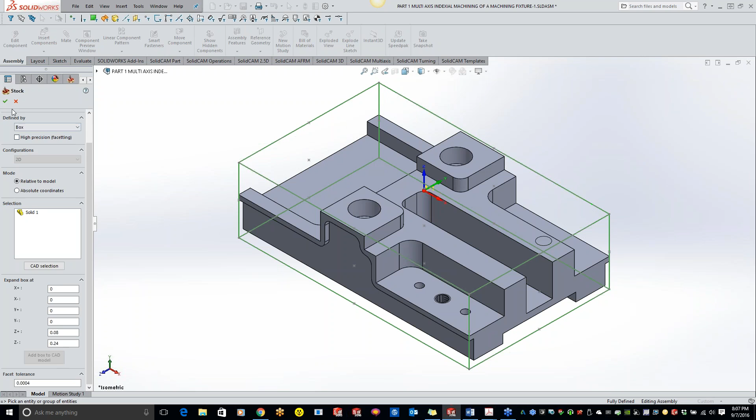So by clicking that green checkbox, we have everything all set. We have green check marks by everything. Now, if you guys are looking at your SolidCAM, it looks a little bit different.

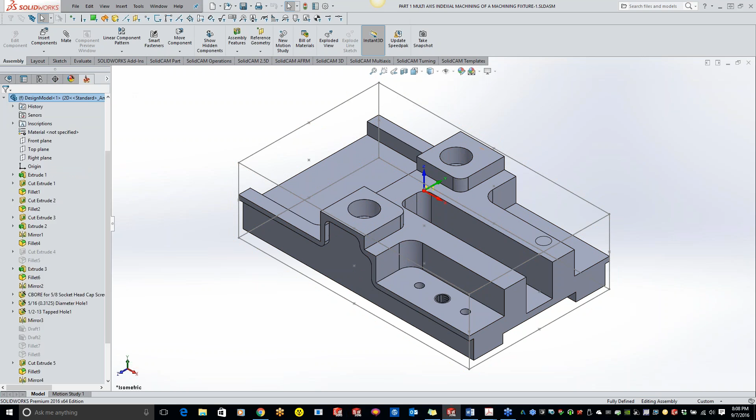Hit the green check mark, and we can start programming. So you'll see that we're still 100% inside SolidWorks. If we need to go back to our SolidWorks at any point in time, you can just click on your SolidWorks tab and have all my features right here. So I'm just going to start off with a simple face mill. Just right click, add milling operation, and do face mill.

Now with 2016, it automatically found my perimeter for me. If I want, I can do a show, and it'll show me a wireframe of where it's going to face mill out to. So if we do a straight down view, you'll see it covers the whole part. Now I'm going to grab a tool. I'm going to hit select. For this one, I'm actually just going to add one, and later we'll bring some tools in for you guys from the libraries that you have in your install.

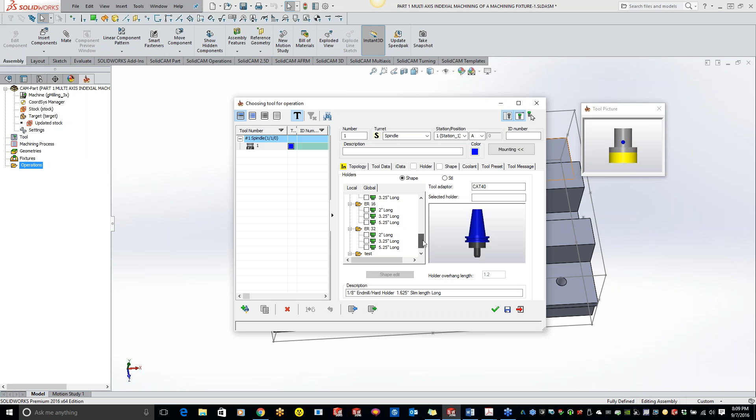So we'll turn our tool on, and we'll do a 2-inch face mill. And if I want, I can get this tool picture out of here. I can get my holder on there, and put different holders on there if you guys want. For right now, we'll just leave it with no holder on there. With the holder, if you guys didn't know, it is full crash detection and everything for you guys.

So now, got our levels right here. So my upper level, if you're not ever sure, you can just click on the part. And what I'm going to do is grab the top corner. And when you see it green right here, that means it's physically linked itself to the SolidWorks model.

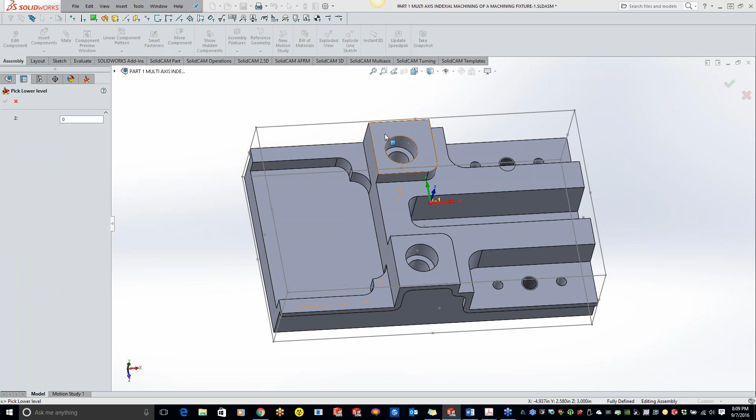And I'll face mill down to that depth right there, and we'll use a hatching pattern. Inside the hatch, I can change angles, I can extend it off. As I'm clicking through here, you guys will see the picture down here update for you.

So definitely, if you guys have questions, you can click on what you're looking for, or like I said before, click the question mark, and you can click in that field, and it will tell you exactly what's going on. We put a lot of time into these help menus for you guys, so definitely take advantage of that.

Back at the tool holder, we had a question regarding the Cat 50 holder library. We don't have a Cat 50 holder library right now, it's all 40 in there. But we can definitely create Cat 50 holders for you guys, it's no issue at all. We might actually do that as a class, showing you guys shaped holders and stuff. I think we covered shaped tools in a previous session with the tool libraries, but you can definitely create the Cat 50 holders for the larger machines out there.

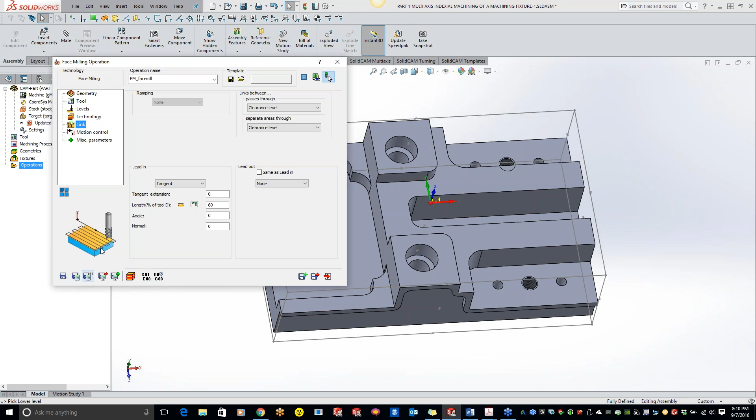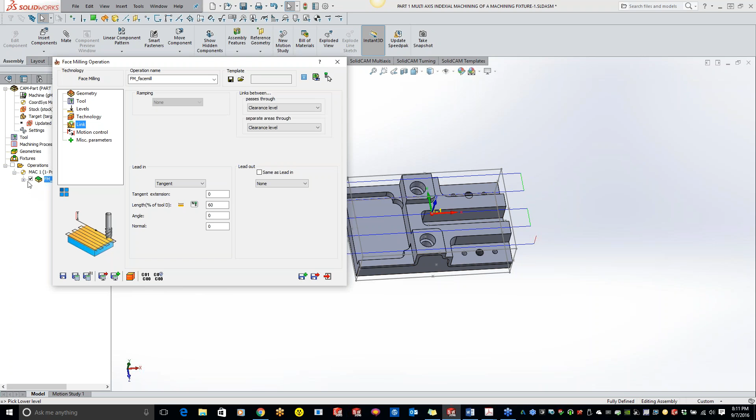Once we get everything set, we can just do save and calculate. Right now you'll see that as I move my mouse around, I have the tool there. If you guys ever want that off, just click the little box right here and that will eliminate it. Another quick shortcut: if you want to see the tool path, it's defaulted, so as soon as you do save and calculate it automatically turns on the tool path. But if you want a better view, just double click up here, it minimizes the face mill operation box, and you can zoom in and see what you're looking at. Then just double click on it to get it back.

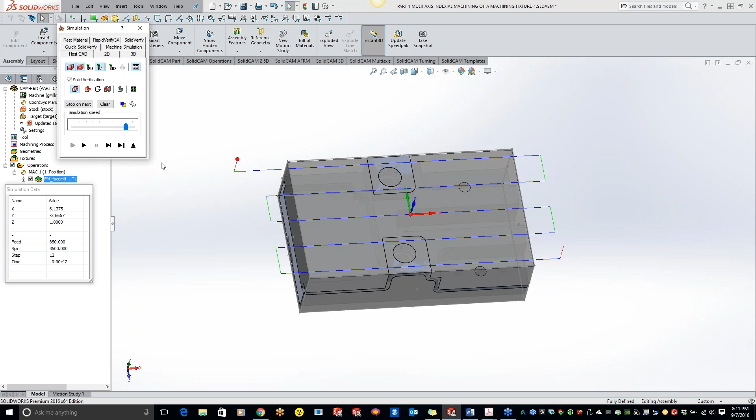Now, if we want to do a simulation, there's lots of different simulations in here. My two favorites are Host CAD and SolidVerify. Host CAD does the wireframe of kind of what you're seeing right here. We can also do a Quick SolidVerify, showing you the stock that's there and whatnot. But my favorite is SolidVerify. Come in here, we'll slow it down a little bit for you guys, and you can see it machining off the part there. So this is full crash detection for you guys.

You'll see that we actually have cycle times down here, your X, Y, Z values, feed rates. You'll see a feed rate of 850 right now - that's not the feed rate it actually machined at, that's the rapid feed rate right there. So that is face milling.

Now we'll get into a little bit of a complex pocketing. Before, you'll see that we have multiple different levels, and there's a million ways to machine this part. We can mill these off on each level height, or we can do 3D machining and basically wipe out the whole entire part and just come back and finish up the walls and stuff. But since we're going over some easier 2.5D tool path here, we're just going to stick with standard pocketing.

So I'm just going to add a milling operation right here and do a pocket. If I go to my SolidCAM, you can right-click and add operations right here, or you guys can just use your SolidWorks ribbons up here and click on pocketing also - it does the exact same thing, just shortcut keys in there for you guys, and you can modify these just like SolidWorks. If you don't want to see one of these in here, you don't use it often, click and drag it off and it will get rid of it for you. These are fully customizable, so definitely take advantage of that. Set them up as shortcut keys too, or mouse gestures also. So we'll do pocketing.

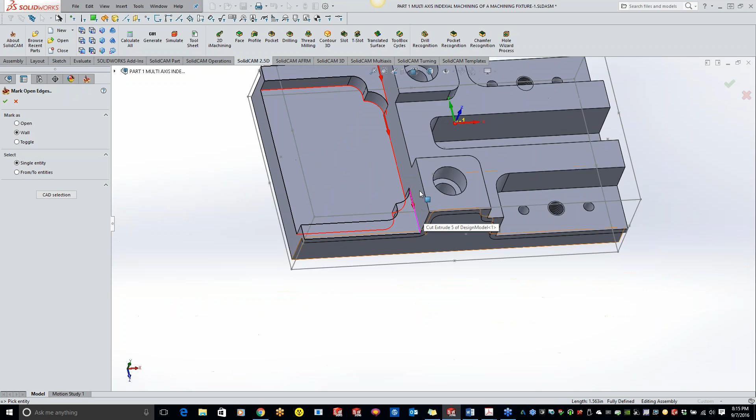So I got that one. We'll do the same thing over here. Got our chain. I'm going to mark that chain as open and come back and do open edges and turn that on as a wall. You'll see it turns pink for you guys. Hit the green check mark.

Now I can start working on the pockets on this side. So I got my chain there. We'll do mark open edges, and we'll do open. Sometimes the little wireframe gets in the way, so just go ahead and rotate your part. Hit the green checkbox there, and we'll continue going over to this pocket over here.

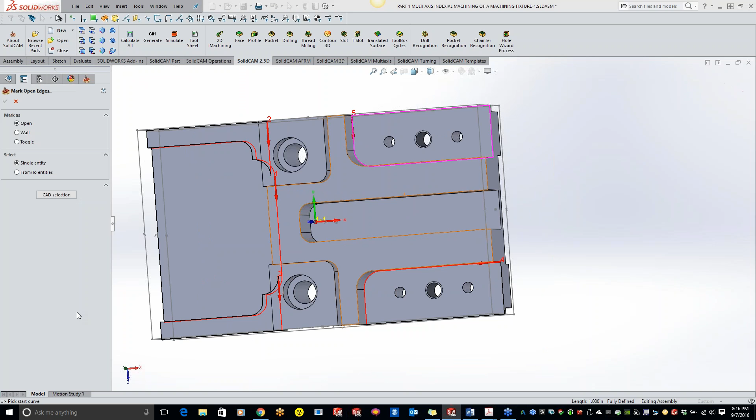And we'll do another mark open edges. All right, so we got that spot pocketed out. Now we'll go ahead and grab this inside one here.

Same thing again, mark open edges, and I'm going to tell it that this area over here is open. Now we're going to pocket out the whole top here.

All right, and we'll actually reverse that chain. Now, basically, I'm going to mark everything as open instead of going through and marking open edges one by one. So I'll mark the chain as open, then come back and mark open edges and tell it that these 6 areas are actually walls, so it doesn't violate my walls here.

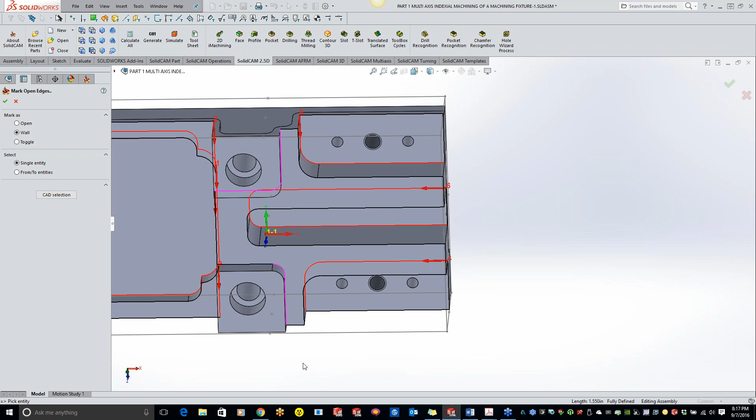Okay, so now we have all of our chains for all of our pocketing here. I can hit the green check mark out, and we'll go ahead and grab a tool.

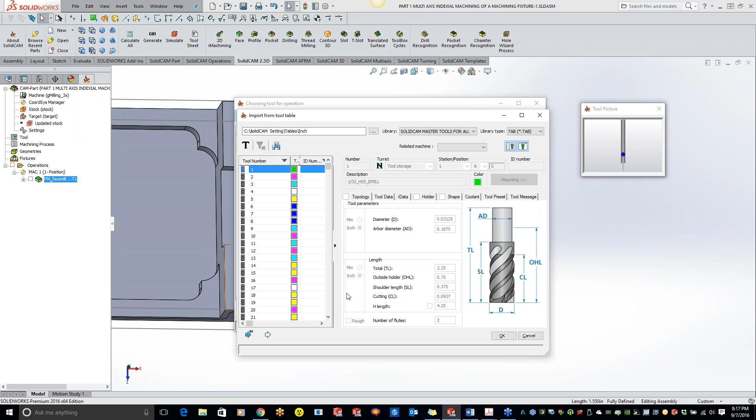Now this time I'll do an import. This one is actually set for mild steel, so I can come in here and grab mild steel if I want, or we can grab the aluminum. It really doesn't matter. You guys can also expand this so you can get some more information in here.

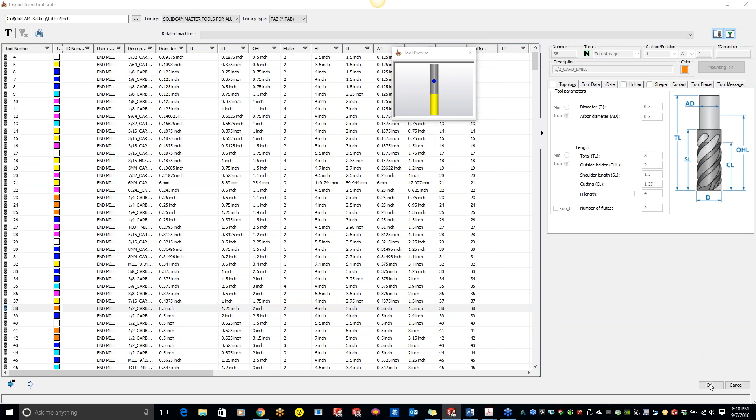So what I'm going to do is grab a 1/2 inch end mill here. I'll just go through, I got a bunch in here for you guys, so definitely take a look at what's in there. So I'll grab that 1/2 inch and hit OK. Oop, looks like I got it twice. Delete that one.

Okay, so hit the green check mark and come into our levels. Now here's the difference: right now it's set to all being a constant 1 level. Constant 1 level is you just pick the upper level and pick the lower level. Since all these are done at multiple different levels, we're going to want to click on variable levels.

So now what that does is it eliminates the upper level and lower level. With the variable levels, you can just open this up and tell it what the depth is. So our chain 1, you'll see how it highlights in yellow. I can just click on my depth right here and click on the bottom of the part, and it's going to pick that depth up.

So my chain 2, I'll just click on that one. My chain 3, click on that level right there. Chain 4 is going to be this level. And chain 5 will be right here. Chain 6 is that center.

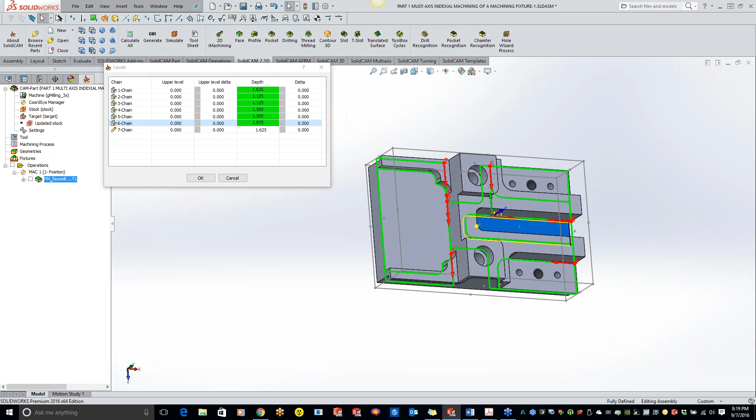And chain 7 is our upper. So we'll click right here.

I've not seen that before, Kevin. Is that 2016 new functionality? No, 2015. Something we added in 2015 last, they came up with that.

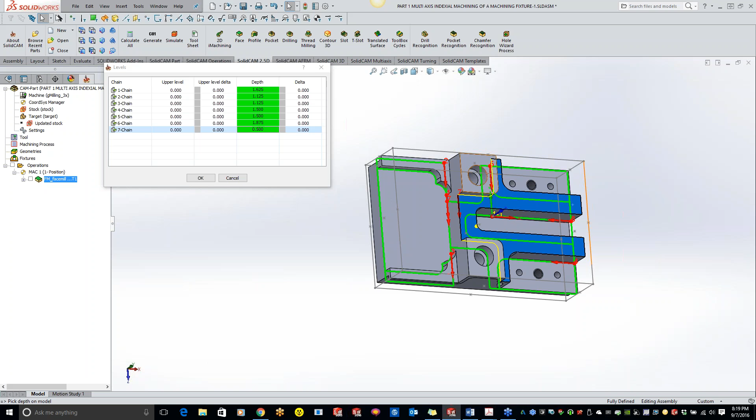So it does multiple different depths right there, and you guys can add deltas in there. You guys can pick your upper levels, since we're starting at the top and working our way down. Normally in years past, you'd have to break this up into 7 different operations because they're all at different levels. Now you can do it all in one. That's how the variable levels work.

Then you can come in here and pick what kind of strategy you want to use. We're just going to use a contour. If you want to do a wall offset, come back with a finishing, but we're just going to finish it right to size, so we can hit save and calculate, and we have all our toolpath there. If we do a solid verify, speed it up a little bit here, we have our whole part completely machined out, pretty much all the way done except for our counterbores and our holes.

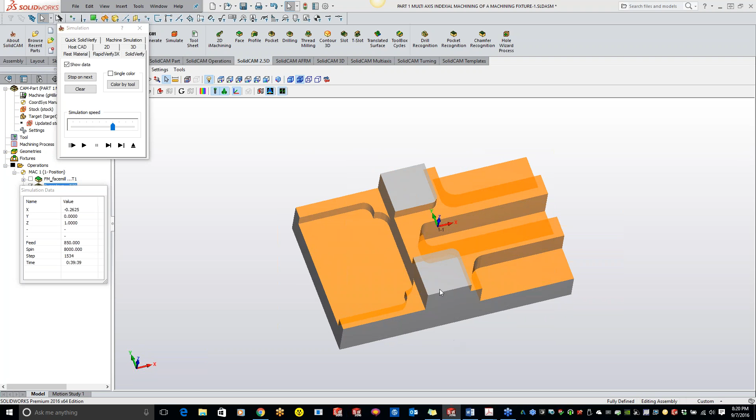If you guys have a 3D professional package, I would definitely use 3D iMachining with the prismatic, because with 3D iMachining, we'll get into this later when we get into the more 3D parts. Basically, all you do is pick the tool you want to use, and that's it. It automatically finds everything for you, so you don't have to build these chains. So those of you on 2.5D right now, if you're running parts like this, I know it's not a 3D part, but 3D iMachining is going to save you a ton of time, and that way you can use the iMachining too.

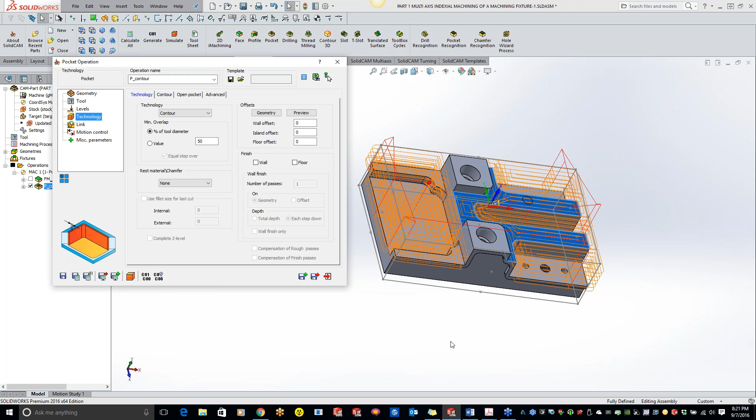So any questions so far with what I've shown? Looks like we're good. All right.

For those of you that aren't sure, these little checkboxes just turn on your toolpath. If you just want a quick preview, click over here, and it's going to show you a preview of what's going on. It gives you a little bit of a sanity check as you're going through.

I've already done a no-no, I didn't label these correctly. I just left the default, so you can come in here and rename. Let's see, where is the rename? You can rename this one as, you know, pocketing whole part, or something that gives you a little bit of telling you what that operation is doing.

But for that, we will start going on. I think what we'll do now is some spot drilling. We'll get ready to drill these counterbore holes, and we'll come through and drill these holes also. So we'll just do an add milling, and we're going to do a drilling.

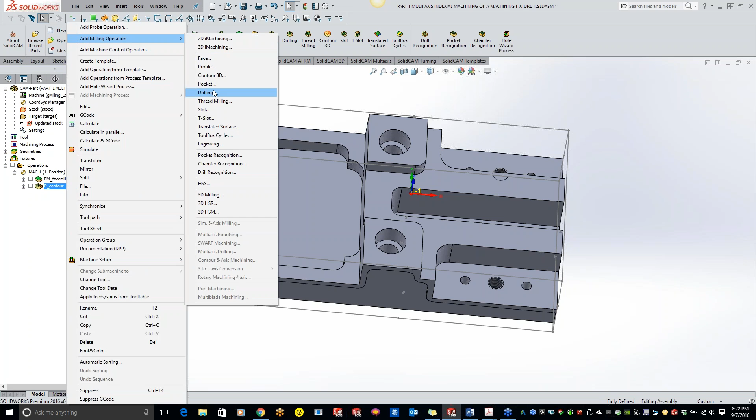And I am going to grab these top counterbore holes right here. Now, a couple of different ways to grab these. I can click on the surface and click on the surface, and it's going to find the holes for me. Another way of doing that is coming in here, and I can expand my tree down, and I can just click on it, and it's going to find my counterbores for me. That's the best thing about working inside SolidWorks, is we can take advantage of the feature tree over here.

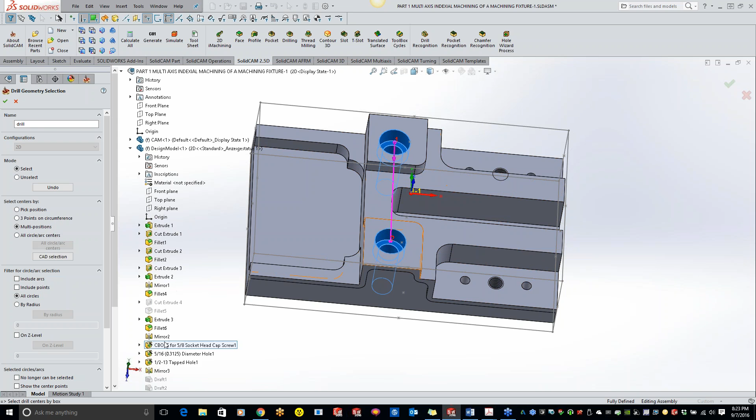As you're working, let's take this part, you know, really complex - maybe you have 500 counterbore holes, and some counterbores are just a little bit different size. You can come over to your feature tree and just click on which ones you want to use.

So now we're going to grab a tool, and we'll just add a 1/2-inch spot drill here. Levels, upper level is going to be 0, and you don't have to pick your upper level because it's automatically defaulted to 0. But if you have a coordinate system that is higher up, or maybe like when we do these holes, the upper level is actually going to be down here. So if you know your holes are up at the top, you really don't have to worry about clicking the upper level.

Now, since we're doing a spot drill, I don't know how deep I want to go, so I'm just going to put that at 0, and I'm just going to tell it to do the full diameter, which is going to be - did I only add, I just did a 1/4 inch? It's supposed to be a 1/2 inch. Come on, Tim, why didn't you catch me?

Sorry, okay. I dozed off for a moment there. Oh, I know it's getting late for you, old timer.

Okay, so we're going to do a full diameter. And also, if you guys aren't sure on sizes, what you can do is just click on the edge, and it will actually tell you the diameter down here. So if you're uncertain, instead of doing the evaluate feature, you can just click on any hole, any radius. It's going to give you the numbers down here.

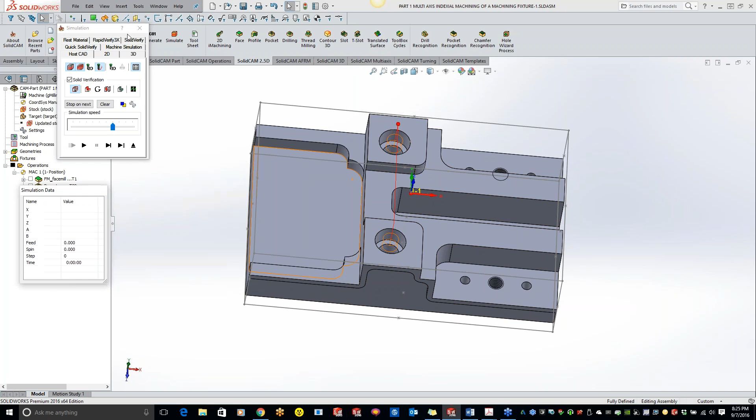So I got my hole set up. I'm just going to do save and calculate, and just do a solid verify so you can kind of see. So we got our spot drill right there, spotted down to the full diameter of the face. So now I'm going to get into my drilling.

I'm just going to make a copy of what I did. This button right here basically makes a mirror image of the previous operation. So the only thing I really have to do is grab my tool, because the geometry is already done. Now I'm going to grab a drill bit here, and that hole I already know is a 21/32 hole, but I can just highlight that and click on the edge, and it will populate the number for me for my drill.

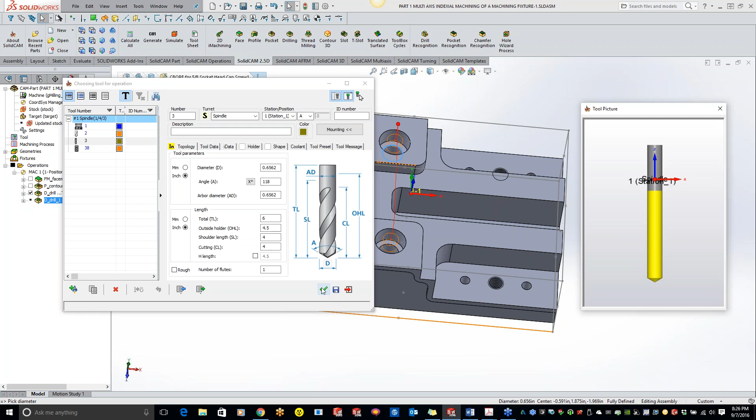Obviously with that drill it's going to be much longer than 6 inches. Outside to holder, we'll call that 4.5, and cutting length on that we'll say is 4 inches. And as I'm editing this, you'll see that my picture will automatically update also. So hit the green checkbox, and if you want, you can definitely add the coolant in here, and your feeds and speeds and stuff like that.

The default libraries that are in your system right now are ones that I built when I worked at my previous job using SolidCAM. So the feeds should be somewhat correct in there. Obviously each machinist has his own feed rate that he likes to see, so it's just kind of a baseline for you guys to get going.

Kevin, we got a couple questions here from Dwayne regarding the drill diameters. When you're choosing the drill depth, can you take it to a depth of a particular diameter, not the whole diameter, for doing chamfering? Yes. Dwayne, when we do these holes down here, I'll show you, because we'll actually put an edge break on there. This one, since it's a 1-inch diameter, not many people have a larger than 1-inch spot drill, so we'll come back and throw a chamfer on there with the chamfer option. So we'll get there.

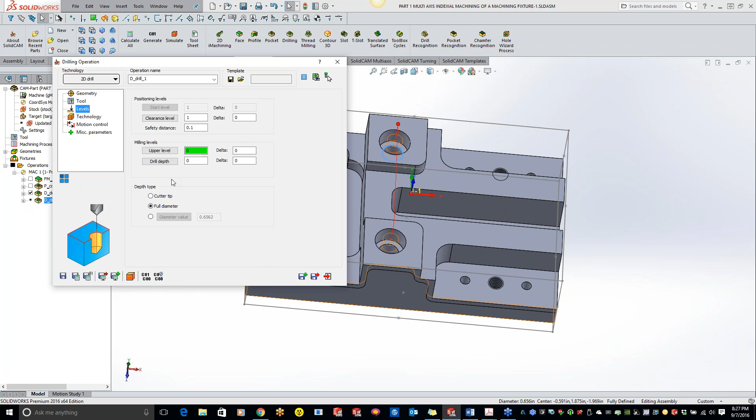All right, drill depth on this one. I'm not sure again, so that goes all the way through. So I'm just going to click on the bottom of the part right here, hit our green check mark, and I want to do full diameter again, but I want to go a little bit past. So I'm going 100 thou past on this part, so I get some breakthrough and I don't get the little cup that gets stuck on there sometimes. And we'll go to our technology now.

Now, for those that are a little bit new to SolidCAM, you basically just start at the top and work your way down. Geometry, you just pick what you want to do. The tool is kind of self-explanatory. Level is kind of self-explanatory. Technology is where all the guts are of each operation. So it's where all the good stuff is.

So, if you guys are doing profile, which I'll show next, you'll actually be able to see many different choices in there for how to machine that part. All right, so we're going to use a G83 pecking cycle, and I am going to set my peck at 100 thou pecks. And the step down is just for visualization on the solid verify, so you guys can actually see that 100 thou peck, and we can do a save and calculate.

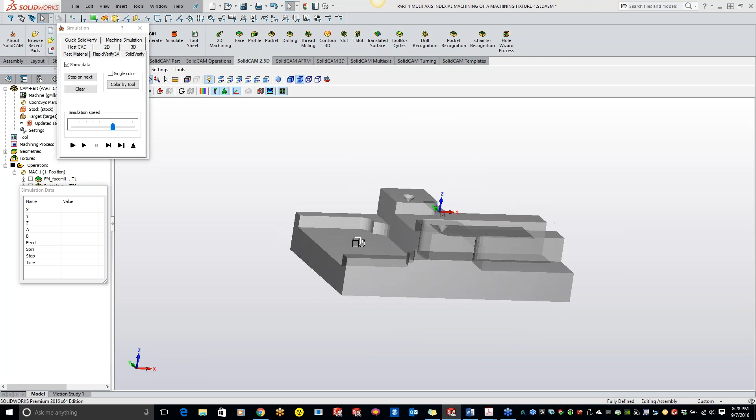So if we do a solid verify on this one, you'll see that my part is kind of transparent right now. For those of you that like that or don't like it, you can just come up here and click on your visual properties, and I can turn that transparency to solid, so you guys see a solid part there. And that's just in your settings right here. I went through these solid verify settings in another night class, so if you guys are curious on what all these settings do, the accuracy, general, all that stuff, definitely check that.

Oh my gosh, it's hailing out. Thought I heard some weird noise in the background.

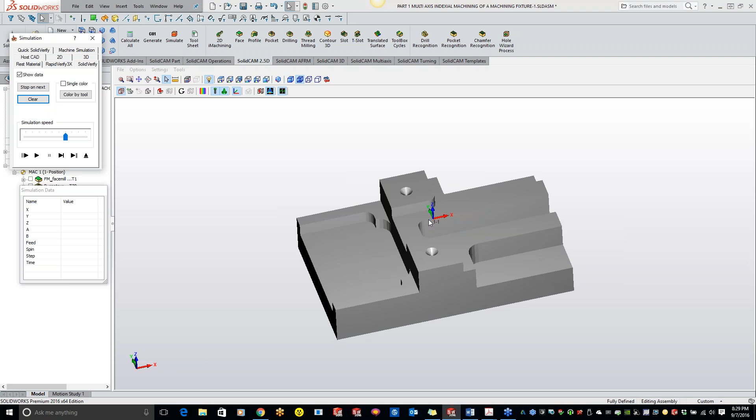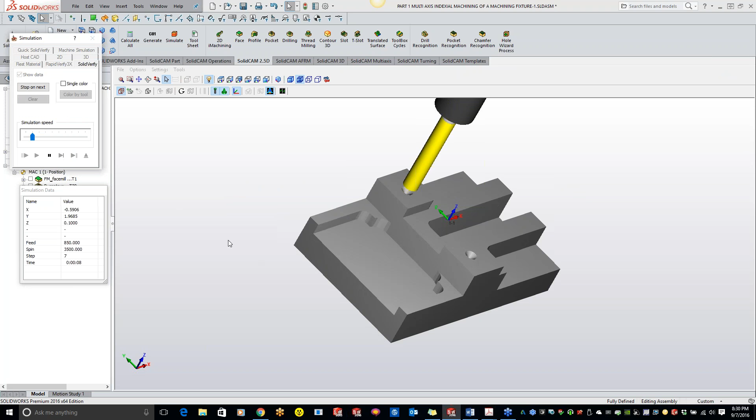Okay, so let's just play this through here. And you'll see that I'm doing a nice peck drill in there. I don't have my holder on there right now, but I can just pause this, come back to my tool, and just turn on my holder, and let's just say we're using an ER32 short holder right there, and save and calculate. Now when we go to our solid verify, you actually see it in there, and it's going to fully do crash detection.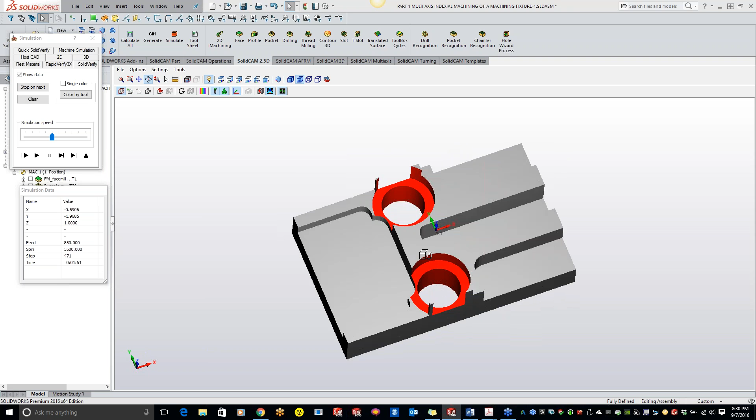Okay, so right here, basically it's telling me that I have crashed. I can continue, I can stop for current operation, or I can just stop it. And you guys will see if I click continue, it's going to show me every time I crash in there. And you'll actually see in red where I gouge through there. So definitely, if you guys get done programming a part, just do a SolidVerify to make sure you have everything set, because it's pretty easy to throw a bad number in there.

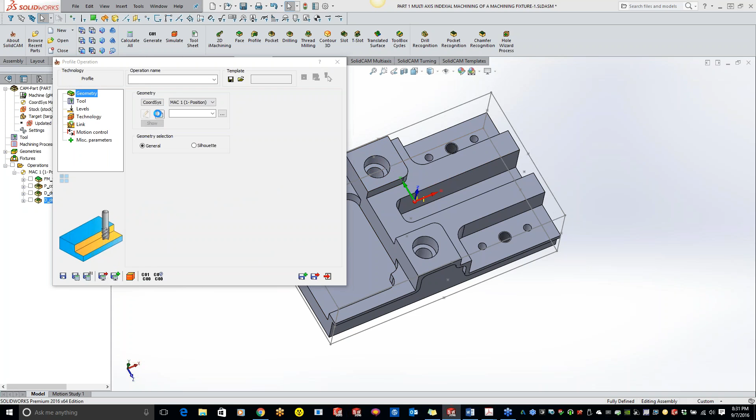Okay, so now we got our drilling operation, and let's go ahead and do a circular interpolation for these counterbores. I have a 1 inch diameter, so I can probably use that same ½ inch end mill in there. So I'm just going to do an add profile operation right here. And we'll just go ahead and chain this guy and chain this guy right here. Hit our green check mark, and we'll grab that same ½ inch end mill as we used before. And now, because both my profiles are the exact same depth, I can just use my constant instead of using the variable like we did before.

And actually, did I do a pocket or profile? Okay, I did profile. Okay, so now what I like to do, and it's totally personal preference up to you guys. You guys can definitely just come down and rough it out. We can do this in steps of, let's say, 50 thou, save and calculate. And I'll show you what this looks like, but I'll show you what my favorite one is. So right now, let me slow it down a little bit here. We're stepping down onto the material, doing some retract as it's going around.

My personal favorite, I think I said this before, is using the helical feature. This keeps the tool in contact with the workpiece at all times. So now if we do a simulate, SolidVerify here, we'll do a nice helical entry down and a finish pass too. So definitely, the sky's the limit on what you guys want to use.

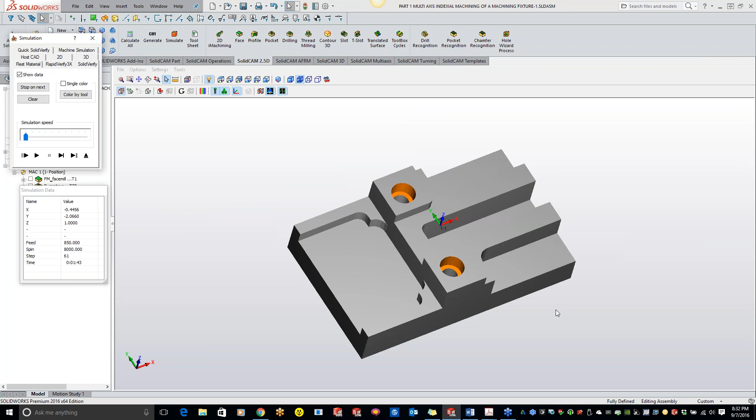And like I was saying, the technology section is where all the guts of everything is. So if we want to turn compensation on for rough passes now, new feature in there, or if I want to turn compensation on for finish pass, maybe I want to change my tool side from left to right. If you want to do a modified geometry, I can switch around my geometry all right in here.

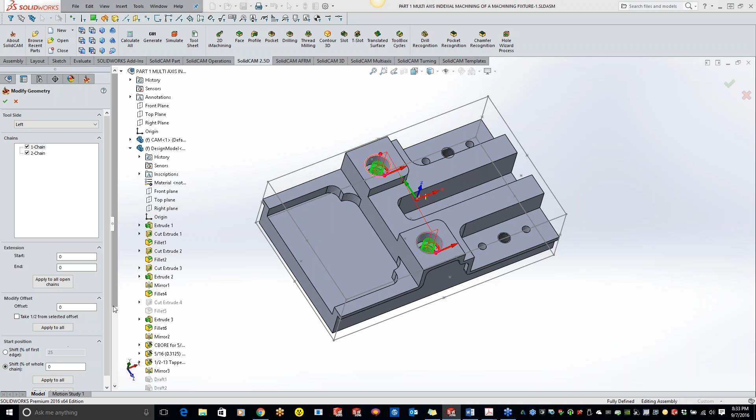I can change my start points. So right now we're starting over here, but maybe I wanted to shift my start point to a certain section. So I can shift it 25% right there, or I can come over here and just click where I want it to start, and it's going to shift it over for me.

So lots of stuff in there. Generally, everything that's set in here is already set for you guys. So if you guys are new to it, definitely just stick with the standard stuff in here. It's going to get you what you want, but you definitely can fine-tune things in here as you want. So maybe you want to do helical going from the bottom up to the top. We can switch the direction this way right here too.

Kevin, if you could just back up a screen or two here. Ronnie's asking about the intersection. Ignore toolpath intersections. Oh, there it is, right below the tool side left geometry, just below that. Ignore toolpath intersections. That is something new. And actually, I really haven't played a lot with the intersection. Yes, we don't even have it in here as our questions pane.

I'm guessing it's going to ignore any intersecting points right there, but Ronnie, I would have to look into that one, something that they just added in there with this build, or a couple builds ago. I just haven't had a lot of time to check into what it actually does, so I can definitely let you know on that, Ronnie. All right, any other questions on the profiling or what I did here?

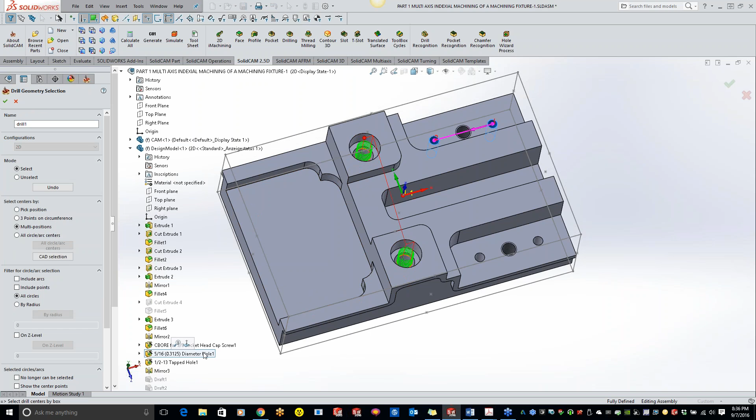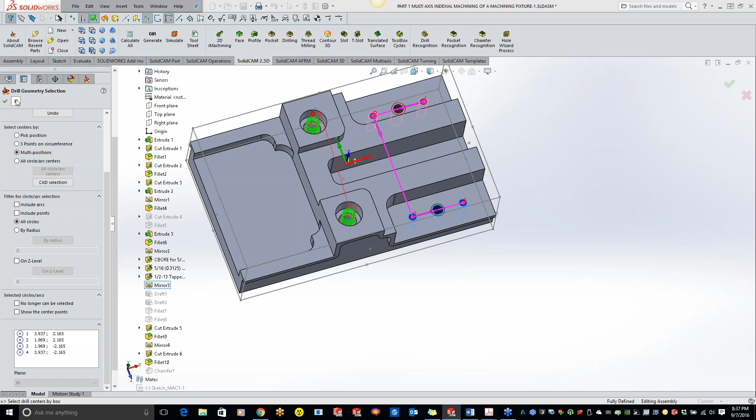So I'm going to come down to, let's see, it's these holes right here, and I've got to scroll down. I see what I did when I actually created this part is I mirrored these holes over, so it's grabbing one extra drill hole here. So what I can do is just come in here and right click and delete that tapped hole out of there, because I don't want to have that mixed in there. And now we'll grab that same 1/2" end mill.

Now Dwayne, what you're asking here is on our levels. Our upper level is going to be the top right there, and I'm going to do a drill depth of 0. But now I'm going to spot drill it to a specific diameter. So I'm going to checkbox the diameter value, and I'm not sure what size it is, so I can just click on it and hit the green check mark. Now it's going to chamfer it to that exact size, but if I want to add a 10 thou chamfer on there, I can just quickly modify it and add 10 thou in there.

So it actually gets a nice corner break on there for you guys. So that's how you can add that diameter value in there: just click the diameter button, click on it, or if you know what the actual diameter is, you can just type it in there or type in what size you want in there.

Save and calculate. We can definitely do a simulate for you guys so you can kind of see. Doing our spot drill right there. Now the nice thing too is once we get done, we'll organize all these drills, so it's doing all the spot drilling at once, it's doing all the drilling, so we're not doing all these different tool changes. So now we'll do like what we did before, just make a copy, and our hole is just doing a regular tapped hole or a drill hole.

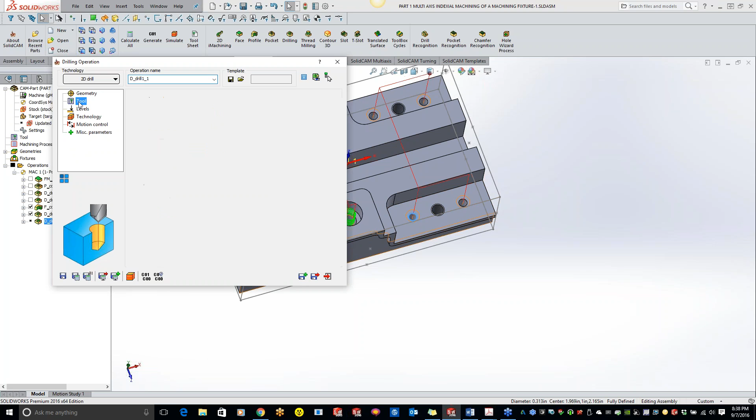So I'm just going to come in here, and it's the 5/16. So I'm going to add a drill. And like I said before, if you guys aren't sure on the drill size, just come in here, click, and it's going to fill out the information for you guys. We can turn our holder on. Maybe we want to use, instead of an ER32, an ER16. So definitely turn that on.

If you guys need coolant, definitely turn it on right here. You'll see that right now I don't have flood actually activated, but we have flood pressure on all the different ones, and these are going to look different for each post that you pick. So some machines aren't going to have flood coolant. Some machines are just going to have a flood with low pressure. So now we can just turn that one on and hit the green check mark.

Come to our levels. Our upper level is already set, so the only thing we have to change is our drill depth. So I'm just going to turn the part over real quick. Now, real quick question, Kevin. Are the fields where you're putting in values able to take equations, or are these just value fields that don't allow for equations?

Equations are coming. It's been a huge request, to actually do what SolidWorks can do, where you can take your 322 and just hit plus 10,000 and it will figure it out. They are working on that as well. Let's just test it, plus 0.10. Yeah, it's not allowing me to do it. So it's in the works for you guys, just to save on time, so you don't have to do the quick math in your head.

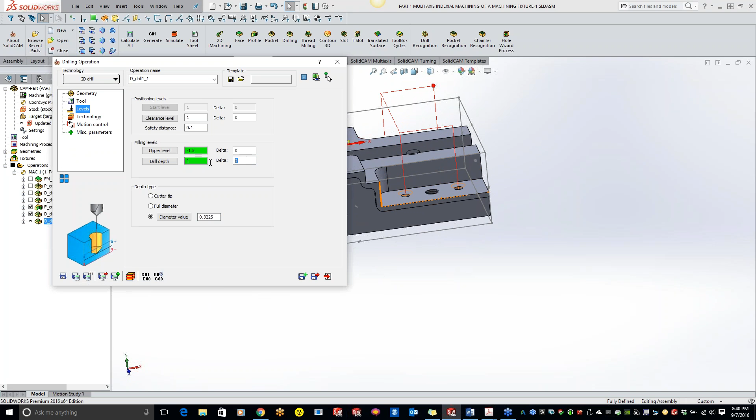Another option, you could probably put a diameter value and then play with the drill depth and the delta depth, to take it to a certain diameter value and then delta it down in there. Yep, absolutely. So now let's see. So we're going an inch deep there. I'm going to go, let's just say 100 thou past, and I'm just going to turn it back to full diameter.

Now, if you guys are doing blind holes, what works really good is to use the tip and actually just click on the bottom point of that hole, and you guys can just use tip for that too. So a couple different options here for you guys. And now we're going to do the pecking like we did before, and we'll just do our peck. Okay. And now we have our drilling operation.

So real easy. And if at any point in time you guys just want to get a sanity check and take a look at the G-code, definitely just click on the G-code button. It's going to pop it up for you guys. If you guys are using CIMCO Edit, this will actually pop up with CIMCO Edit for you guys, and that's just an option inside the SolidCAM settings that we went through a couple weeks ago. So we're just doing a peck of 100 thou, feed rate 100, locations, and you're done. So you can just do a quick sanity check if you want to see what the cycle is doing there in the G-code.

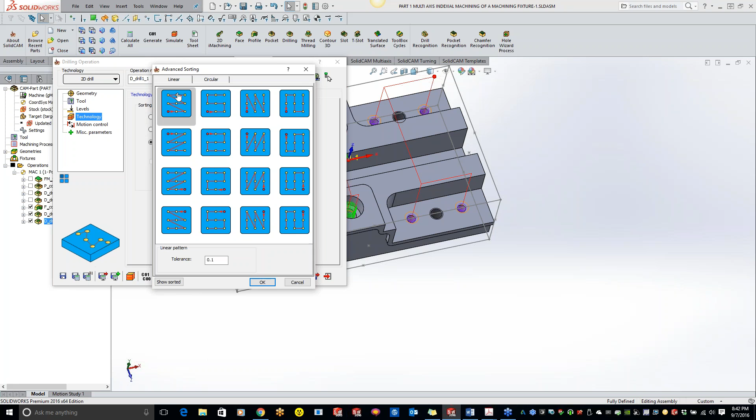Sorting wise, you guys can change the sorting, and let's just do advanced, and you guys can change the patterns to whatever direction you want. So maybe a pattern this way works better. So that's more the linear patterns. If you're doing circle, you have quite a few different options there too.

So definitely check those out. We'll just leave that at default. Now, if you guys were doing a spot drill tap, what I would recommend doing is reversing the direction. So that way we'll come in here, spot, spot, spot, spot, and then we'll drill, drill, drill, drill, and it saves you just that little bit of retract time right there. So if you just click the reverse direction, it will actually reverse it.

But since we're going to group all the spot drills together, all the drilling together, there's really no need for that right at this point. So, oops, looks like I already calculated it. So we got our holes drilled out there. Now, if this is something that you don't want to see, where every time you do a save and calculate it automatically turns on your toolpath, that is in your SolidCAM settings to turn that off. I went over that in the SolidCAM settings KevCAM night class, so you can definitely turn that off.

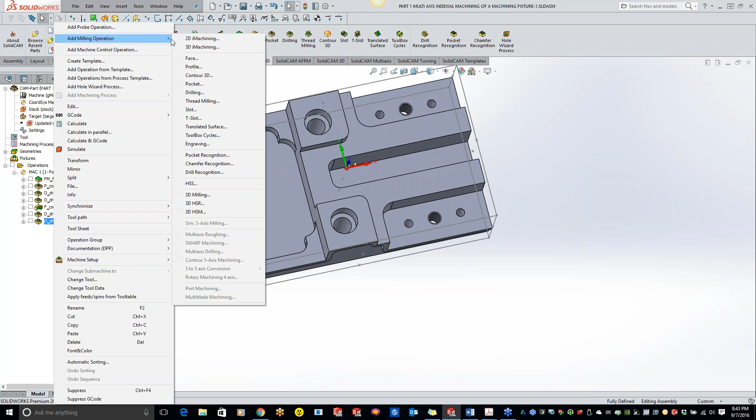So now we are going to use our half-13 tapped holes here. So let's go to our drilling and just grab my half-13 holes here. And we'll grab that same spot drill as before. Now, since it is a half-13, I'm just going to do full diameter here. So we'll just put this at 0, and we'll just do full diameter. And we can do save and calculate. We've got our spot drill.

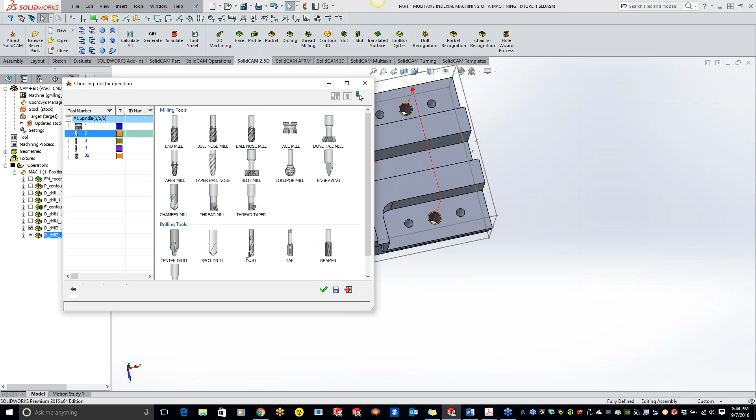We'll do a copy, and now we'll change to a drill here. Let's see, what size is that? 27/64. So I'll add a 0.4219 drill in there. Now, definitely take advantage of the descriptions in here. I forgot I'm leaving these blank, and I shouldn't be. Definitely fill these out, because the more description you put in here, you're going to see it out on the G code. The operator, or maybe even yourself, is going to see it in the G code, so it's telling you the size or diameter or whatever you want in here. Maybe just a tooling part number. Definitely put as much detail in here, and build your libraries up too.

I went over how to build a tool library in one of the other videos, so definitely put a description in here. Make your own libraries of what you have on dedicated tooling on your machine. Maybe you just have a tool rack full of tools that are set up at all times, so definitely build your libraries up. Kevin, can you comment on creating a process template?

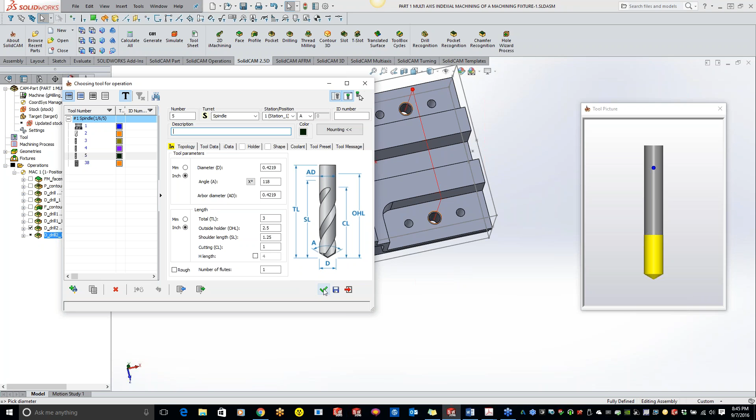You bet. Like spot drill, drill, and tap all as a template that can be used? Yep. So I'll hit the green checkbox there. We'll finish up this one and then we'll do a process template for you guys. We went over the templates two or three weeks ago, but we'll definitely go over it again here. So we'll do our drill depth here to the bottom. I'm just going to go 100 thou past or 50 thou past. We'll do full diameter, turning on our peck, and we'll set 100 thou peck again. 0.1. Hit OK. And we'll save and calculate again, and we'll make a copy again.

And I'm just going to change to my 1/2-13 tap. Threads per inch, we'll do 13, and 1/2 inch tap. And I know our cutting length is much larger than that, so we'll just do 1. Okay. So we got our tap in there, levels again, and I'm just going to leave it right where it is. So we got our tap going to full diameter. Maybe we don't need to go full 100 thou deep. Maybe we can just go 50 thou deeper there. And technology, it already pulled up the tap, so we're just doing a G84.

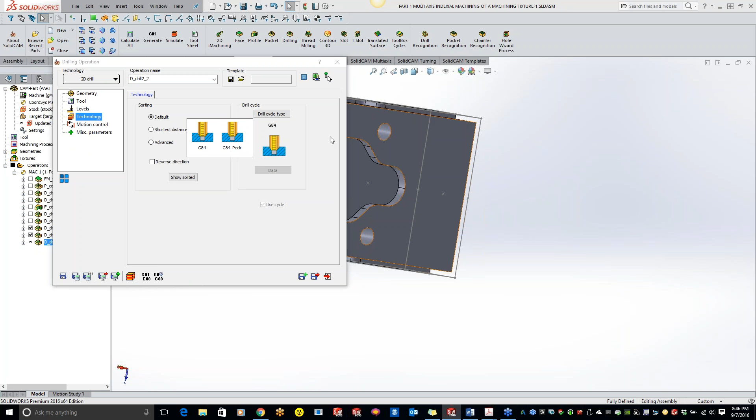If you want, you can do the peck tapping. So you can basically do a G84 with a peck, depending on your post, and it will actually peck it out for those smaller 6-32 and smaller taps. It's kind of nice when you're running that harder material. Okay, so now let's go ahead and play through what we did here. And we'll just do a play. I was doing a spot drill, drilling. Speed it up a little bit here.

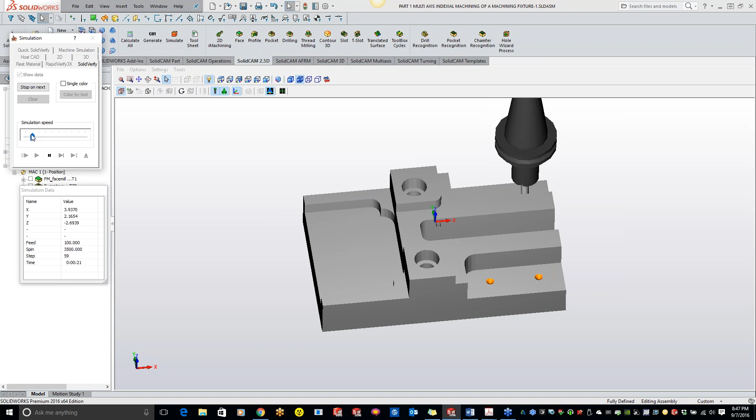And we got our tap. So now, like with the spot drill, I added a little bit of a chamfer there. You'll see it looks a little grainy or faceted right now, but that's all in your accuracy. So if I tighten that up, let's do 0.001 - it should clean it up a little bit for you guys.

Play it through here. So you'll see how we got nice clean edges now, instead of the faceted look - a little bit cleaner. But like I said in the previous one, the tighter you make that tolerance, the slower it's going to take for your SolidVerify to run through. So you get a much cleaner looking part here, really nice, crisp, sharp edges, especially if you guys are running 4K.

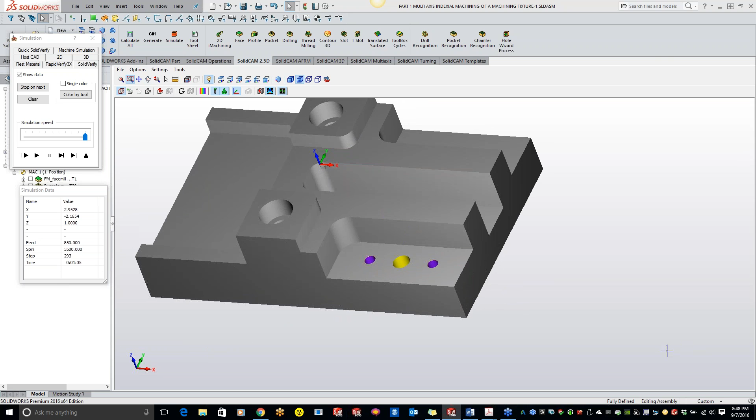So let's do the combo now. Since we just did a spot drill tap right here, what you guys can do is just highlight the operations you want and create template. We can call this, you know, 1/2-13 spot drill tap, whatever you want. Actually, I already have that one created. So what it would look like if you already had that process template set up is, let's go to from process template, and I need to switch this around to 20.

Actually, it's going to be - give me 1 second here, guys. I've got to switch my locations around.

Tables. As you're switching that over, Kevin, there's what Kevin's talking about here, where you can create a process template which just groups bare operations and turns them into a group of operations that get applied as a group. There's also the hole wizard recognition, which is another level of associativity to the SolidWorks hole wizard function - a very powerful thing that's come into play in the last couple of years.

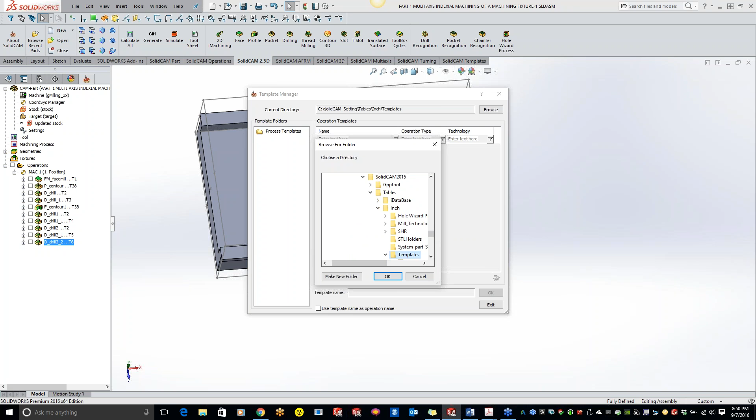Let's see where they have that at. User, public documents, SolidCAM, tables, inch, templates. I can't remember where I saved those templates. Where did I save those, Tim? I didn't see you do it.

I don't remember. All right, so we'll just add this here. Create template. We'll just say 213 spot.

To explain what Kevin's doing: he's setting up a process template for a particular size. It's going to grab the tooling, the speeds and feeds, and everything, and apply that into a template so it can be applied to multiple parts. So if you've got a bunch of 632s, 832s, quarter 20s, 1032s you're going to do - I missed that in the middle there - you set all those individually up, and then you just grab that template and apply it to this part, boom, boom, boom, as he's going to do right here, I think.

Yeah, absolutely. So basically what I just did right there is all that clicking around, changing everything, getting my settings all set up where I wanted for peck and all that stuff. Now I can just come into my process template, click on the one I want to use, select the template name, and basically all I have to do is click on the geometry I want, hit the green check mark, hit OK, and I just spot drilled and tapped all these operations.

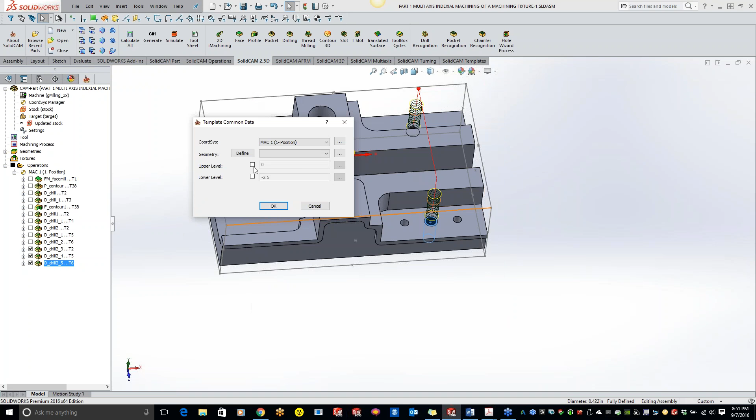All you have to do is click the calculate button and you'll see. Now the levels are all - I can pick the levels inside that. I'll just do a process template here. I can pick the levels inside here too. I kind of forgot to do that when I was here, so let's see - drill 3. My upper level is going to be here, and my lower level is going to be at the bottom.

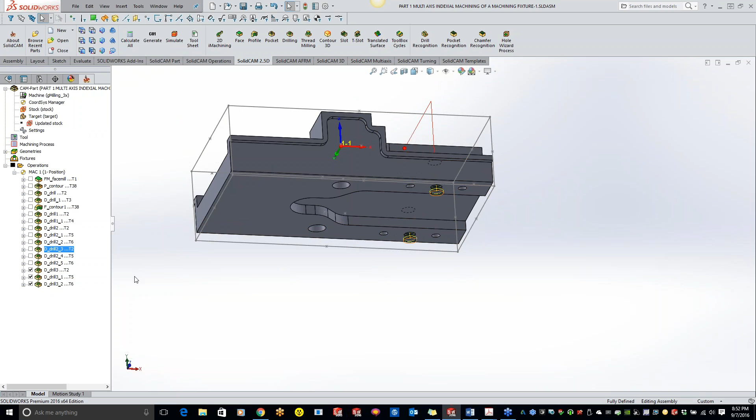Jeff, to answer your question - can it find the tools or bring the tools in if they're not available? If they're already in your local tool table, it will use them. If they're not, it will populate them into your tool table. Is that correct, Kevin? Yep, that is very correct. So if they're not there, it will put them there. So definitely, it's easy to use.

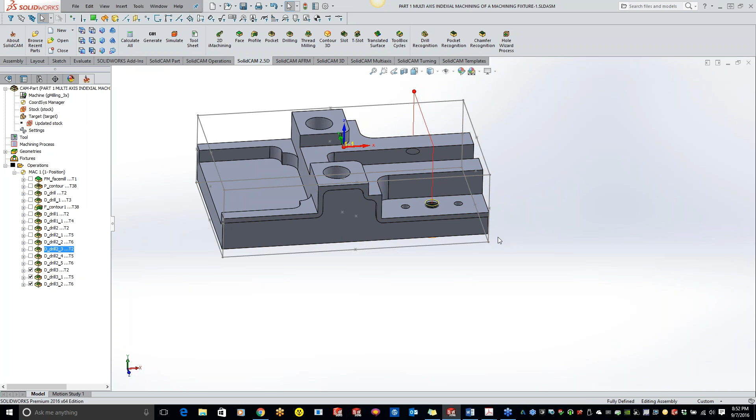Next week we're actually going to get into a harder 2.5D part, and we'll get into the hole wizard process, which will also bring tools in and basically look at the hole wizard that's built into SolidWorks and grab all the information from there as needed. So you guys don't even have to tell it it's a half 13, you don't even have to know it's a half 13 - we're just going to use the hole wizard, and it's going to automatically grab your spot drill and end mill and mill out that area. We'll cover that one next week too.

So do we have any other questions so far that I'm missing out on here?

Okay, so let's flip over to the backside now. I want to kind of buzz through this a little quick here, but basically all we have to do left on the back is just this pocket right here.

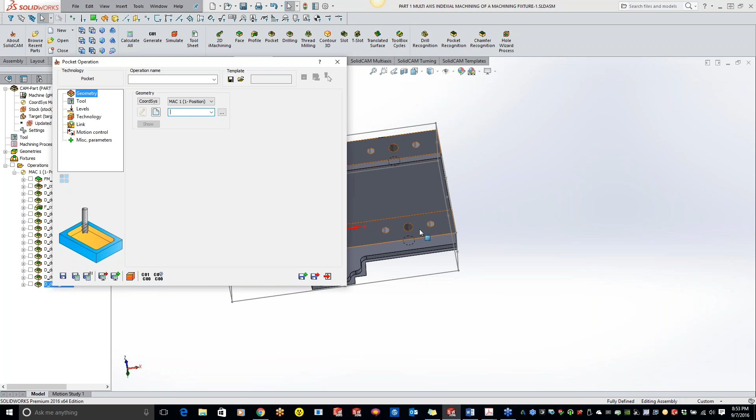So I'm just going to add a milling, and we're going to do a pocket. Now I don't have a CoordSys set up for that one, so I need to add another one. I can click on my CoordSys button right here, click add, and we'll do top center model box again, and we'll flip, change to opposite.

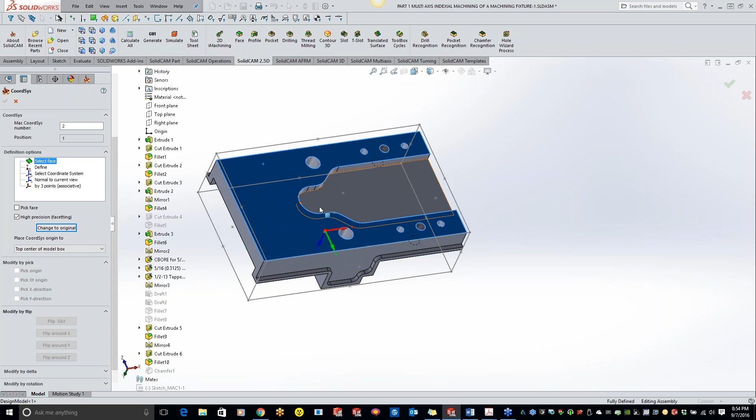Oop, did I not grab it? Select face. And why am I not able to grab my face here? I think it was selected prior, and then you got an order of selection issue going there. What do we got going on here? Try it again. Add. There it goes. Must have clicked something here.

So if I want to put it in the center, I can click on pick origin, and it automatically throws that center point on there for us. Hit the green check box, OK to our levels, and now we can start our pocketing.

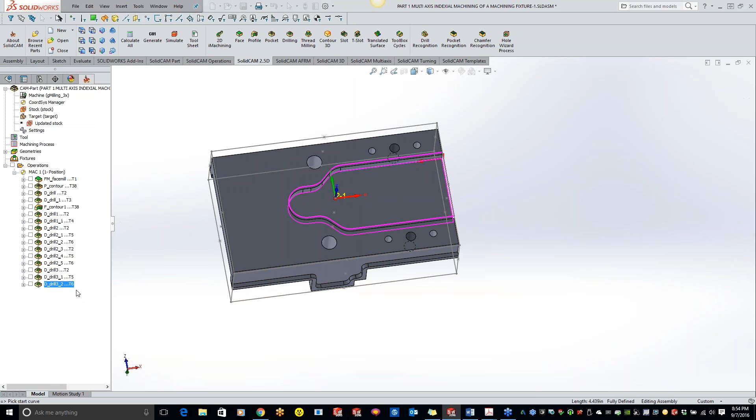So just go ahead and grab our geometry here. Grab our chain, wrap it around. We're going to do mark open edges like we did before. Turns it black, hit the green checkbox.

Let's see, what size? Yeah, we should be able to fit a 1/2 inch in there, no problem. So we'll use that same 1/2 inch cutter as we used before. And grab our levels. And we're done.

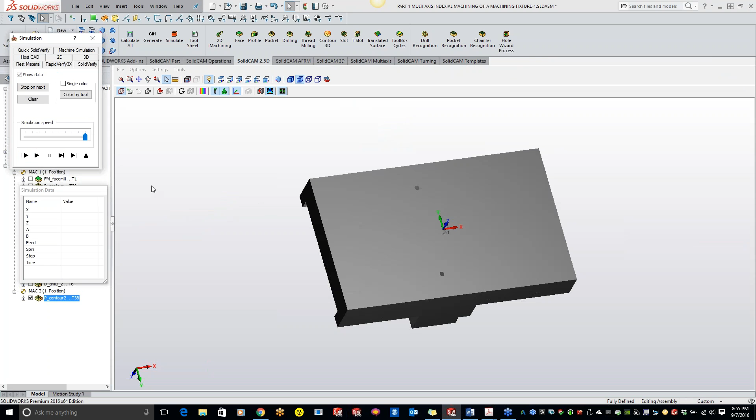Do a SolidVerify. Got a quick question after you're done there, Kevin, for sure.

Adding an M00 in miscellaneous parameters when you get a chance. Okay, so if I wanted a machine stop after this, just come over to my miscellaneous parameters, where it says bStopM00, just switch this to a yes. Save and calculate. And now if I show the G code here, you'll see that it automatically puts the M00 in there right here for you, so we'll do a machine stop for you guys. So add that in there for you guys. Real easy to add in there.

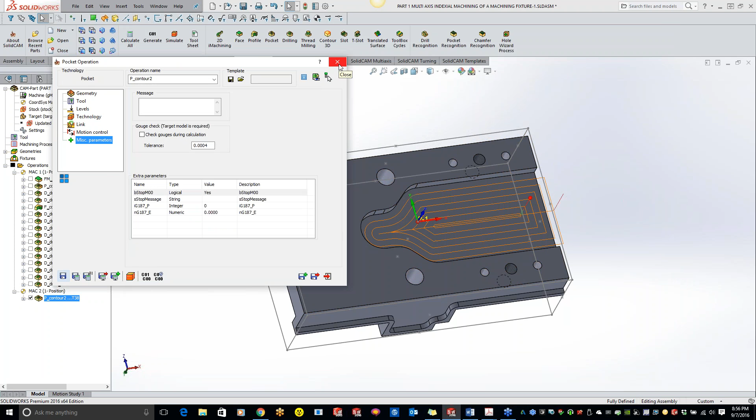So if you guys want to verify something after it's been machined, get the caliper out and just do a quick measure, or maybe you just want to have the M00 on there, make sure the tap didn't break every time for the operator just to check. That's the way to do it right there.

One other thing I forgot to do right here is sorting out your tooling here. So if you guys aren't sure, you can actually click and drag these around wherever you would want. So maybe I want all my tool 2s to be grouped together, so I can just click and drag it to my tool number 2, tool number 2, and tool number 2, and we got tool number 2 down here. So now it's doing all my spot drills right in a row, and then it's going to go to the drilling, and then it's going to go to the tapping.

So those can be reorganized, or what you guys can do is click on the automatic sorting, and you can do advanced sorting by tool options, by tool number, or by tool type. So maybe you want all the end mills to go first, all of the bull noses to go next, and so on. So there's definitely sorting options in there for you guys also. The sky's the limit on what you guys can do there.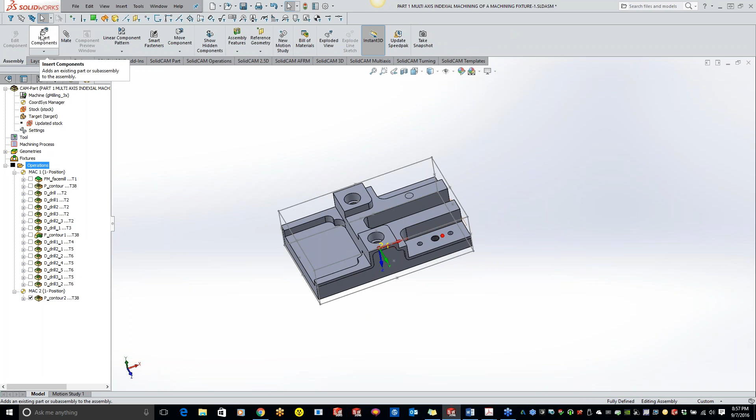Now we'll get to the last side here. At this point, we could come in here, and I'll try to do this as quick as possible because I know we're getting a little tight on time. We could bring our fixture in here, let's see if I remember where I put my fixture. Let's see, projects, Kurt Vise, assembly, and then we can bring our vise in there.

Let's get it rotated around, and move, and now we can kind of mate it up to maybe our first... come on... oh, I forgot to make my vise float.

And if you guys are wondering about fixtures, definitely check out the KevCAM night class fixture one that I did a few weeks ago too. And go here to here.

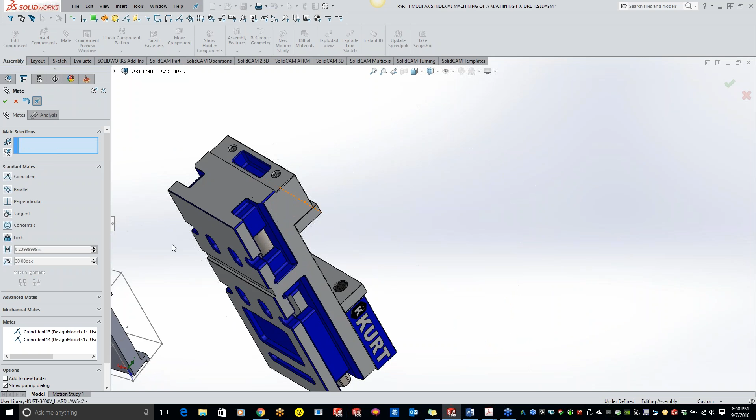Kevin, as you're doing that, James, I see your question. Let me take a look at something here regarding that M00 stop for your Haas.

And let's do there to, and we'll do parallel with this surface, and we'll do an advanced with...

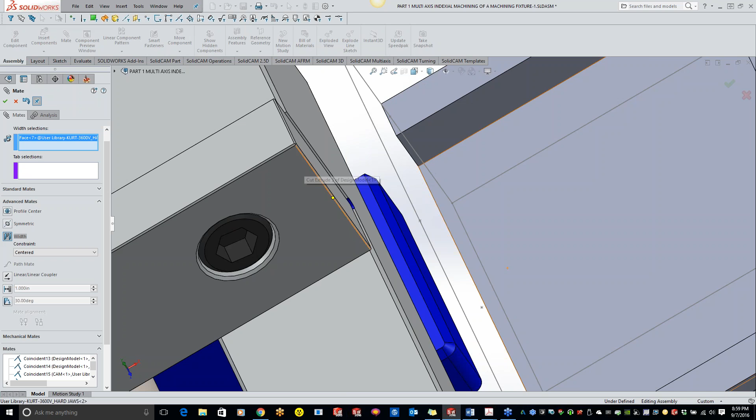So now, obviously I should have had that sitting up higher, but you guys can definitely have that vise in there, and what we can do is define my fixture.

And we'll get every little component in there. Hit the green checkbox, and we'll do a machine setup. Actually, machine setup.

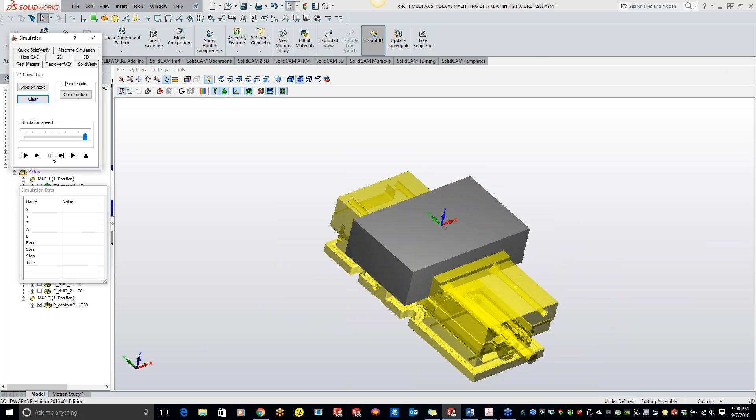So now, when we go to simulate this, we'll actually see our vise in there, with full crash detection against that. And you'll see that I'm actually wiping out my vise a little bit because I put that part way too deep in there, but at least it's showing me where I'm wiping it out and what's going on there. So just another nice feature inside there.

So now what I want to do - what was the question on the M00? The M00 we were talking there for costing, those miscellaneous parameters - the population of those fields in that dialog is based on the post, is it not?

Correct. Yep. Okay, so James, what we need to do is just have one of the post support guys make a tweak to your post to get that option available to you. So I'd say either follow up with Brendan or Harry and Eric, and they'll get that set up for you.

Using the Haas 3-axis. Let me see if I just have a Haas 3-axis real quick for you guys. Haas 3-axis. The green check mark.

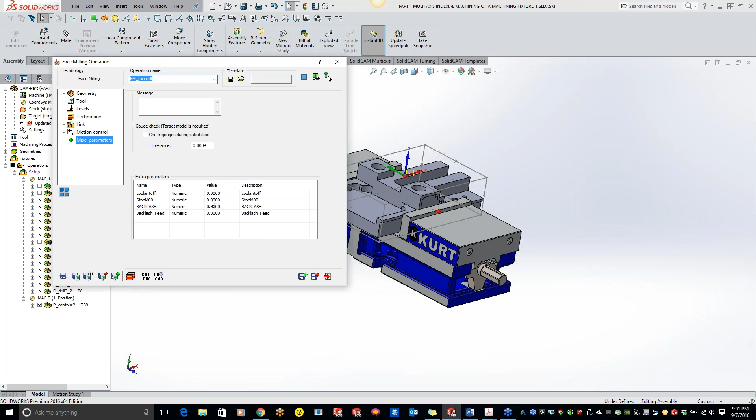And let's just take a look in the miscellaneous parameters. Yep, right here. And it might, James, definitely might be different from what you're seeing, but I'm just grabbing the Haas 3-axis one that I have here, and it is in the miscellaneous parameters right here. So basically you just have to turn that value to a 1, and it will turn that on for you. But like I said, it's solely dependent on your post.

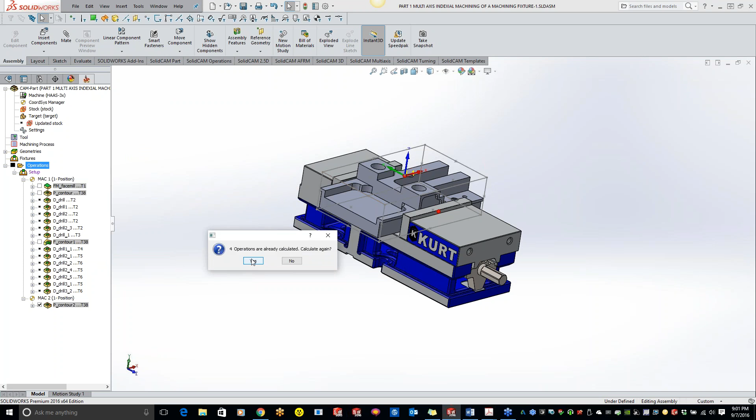So okay, so I have to calculate everything because I changed post processors here. And so now if you guys want to post code out, you can just come over here, G-code all, generate. We have all the G-code, and you'll see - remember when I was telling you guys about the tool description? This is where it puts that tool description in there, so the more detail you guys see, the more you're going to see in here. And maybe you guys don't want to see this in there - we can definitely remove that out.

But we're doing our pocket contour right there. So all the names are populated for you guys.

Now another nice feature that we have too, and like from right here, you guys can just do a save as and save it to maybe your zip drive and stick it over to the machine and run it.

Another nice feature we have too, if you guys aren't familiar with it, is the setup sheets. You guys can use it as a Microsoft Word document, HTML, Excel spreadsheet, and these are fully customizable for you guys. So if you guys are looking on customizing your own setup sheet, definitely let me know and I can send you the document on how to customize it.

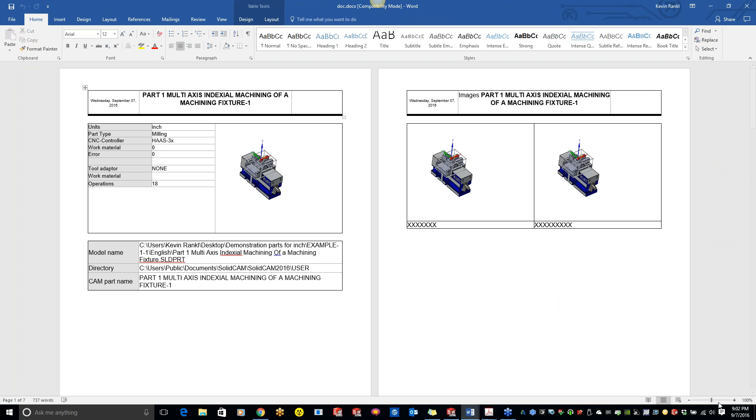And right now what it's doing is actually building the setup sheet, so all the tools - here it's on my other screen here. Let's just zoom in so it shows just one page at a time.

So you'll see where it tells us what part we're actually using here, inch or metric, what machine we're running it on, tool adapters, where everything is saved.

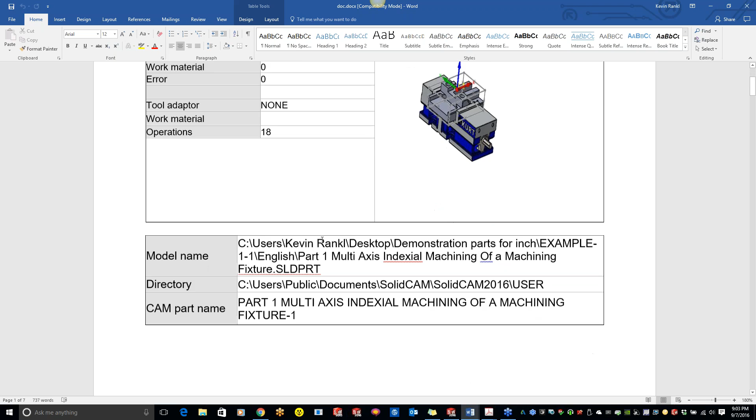Farther down is different fixtures, so you guys can take these - maybe you want to say op1, you guys can change out these pictures too, and then it gets into our tool description. So it gives you tool lengths, H values and comp values that are being used.

So just kind of hand it off to the setup guy, you can run. And then at the bottom, it's going to give us cycle times of all the operations, individual operations first, and then it's going to give us a total cycle time at the very end. So, which is a real nice feature too.

So we have a lot of guys actually using this feature to quote out parts. And then at the bottom, you can see a clamping fixture. And like I said, we're working on Microsoft Word documents, so these are fully customizable for you guys and what you guys want to see in there. So definitely take advantage of it.

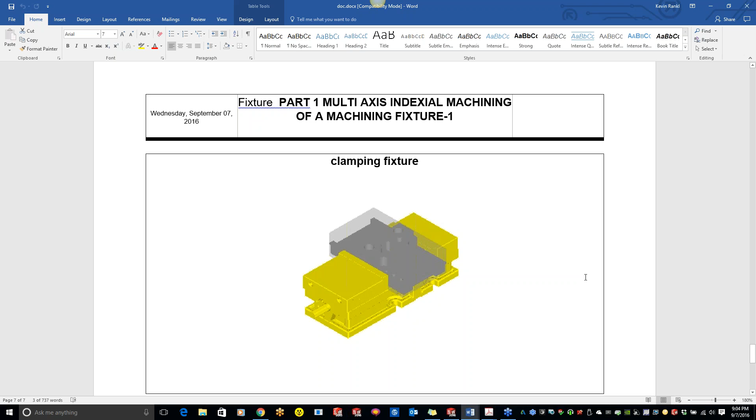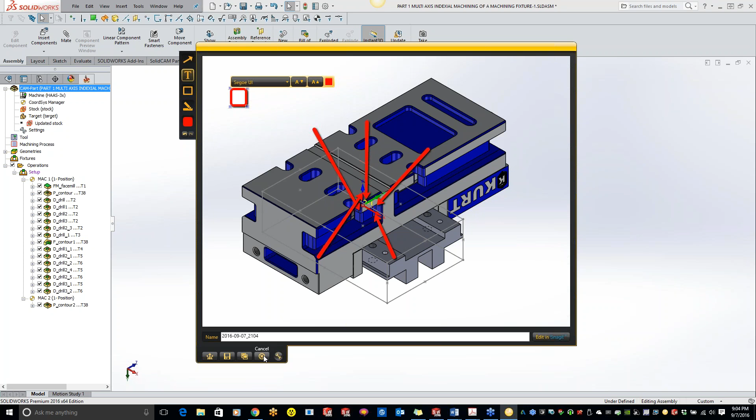And it's another nice feature. And Jing, it's a free download. So if you guys want, you can definitely use that too as a screenshot instead of using the snipping tool that's inside your Windows 7 or Windows 10 or 8.

Any questions, guys, that you guys have so far?